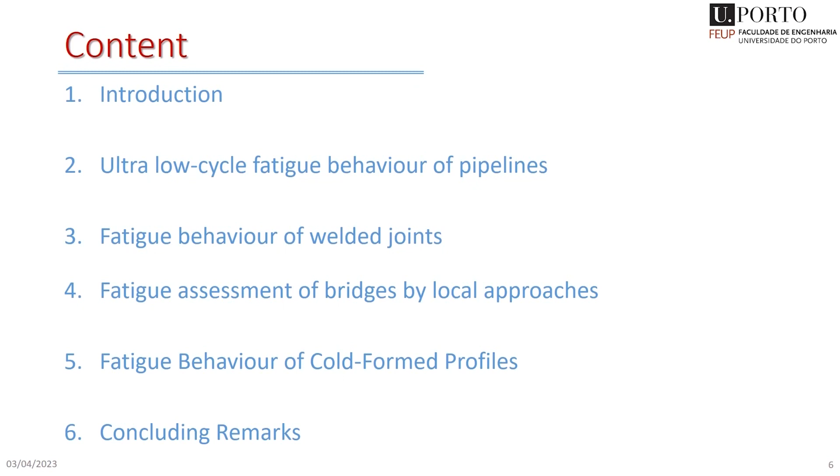Finally, some conclusions. This is a long presentation, so I will try to show just some results from those projects. Most of them were European funded projects, and as I said, they are all about fatigue.

Fatigue is one of the main degradation mechanisms for structures under cyclic loadings. It leads to very significant costs to society, and we must be prepared to address this issue.

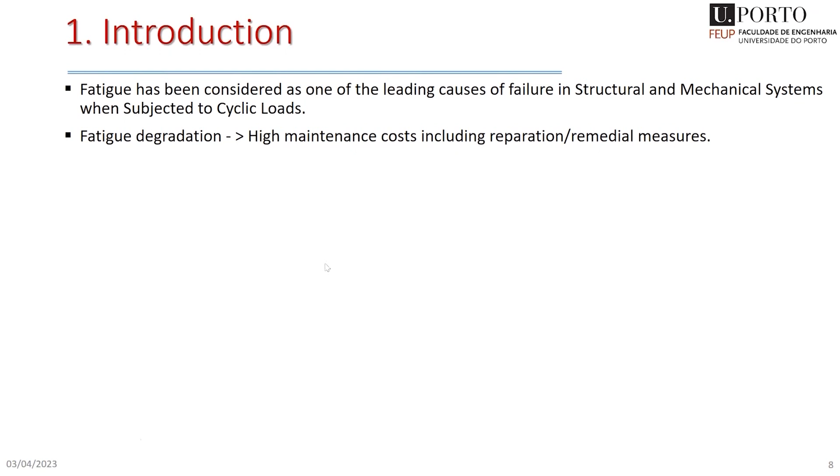Usually when we are talking of fatigue design, we rely on design codes. There are many design codes, but they are mostly based on what I call global fatigue approaches. Basically, we need to test large components, structural details, in laboratory to get S-N curves. From that, we try to classify details by their severity, about stress concentrations, in order to reduce the need for testing.

Then we try to group materials in very broad groups, like steels, aluminum alloys. We rely on stress analysis, but usually we try to use non-local stresses like nominal stress, when I can define that. Whenever we want to improve the design, to bring a new idea, we may be in trouble because our detail might not be foreseen in the previous catalog.

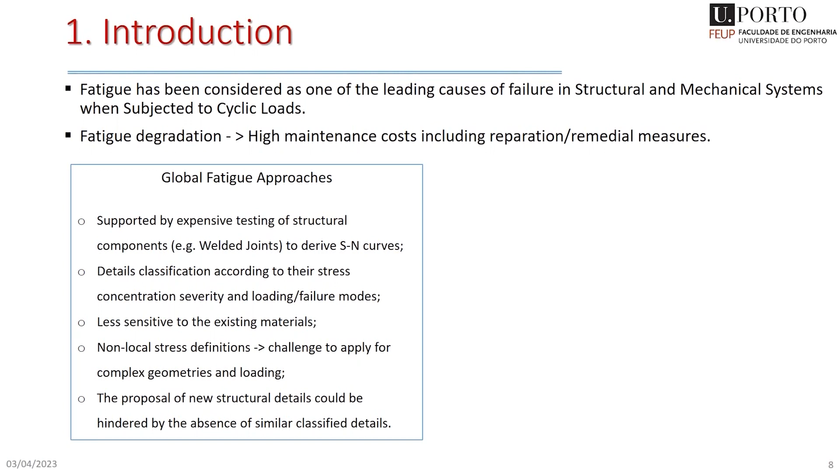So how to solve this? There are two ways. We can keep on with these global approaches, and we may need a lot of money to run tests and certify the new design. Or, as I am defending now, we may rely on material properties, with some very simple and standardized procedures to get those properties.

I'm talking of smooth material fatigue tests, fatigue propagation tests. We could characterize the material, but then we must transfer this knowledge from the material to the structure. For that, we will need fatigue models to make this transfer, and of course we will need numerical modeling to get local fatigue parameters like stresses, strains, energy, fracture parameters. So local approaches are not perfect, but could give us some flexibility for designing new systems. This is what I'm going to talk about today.

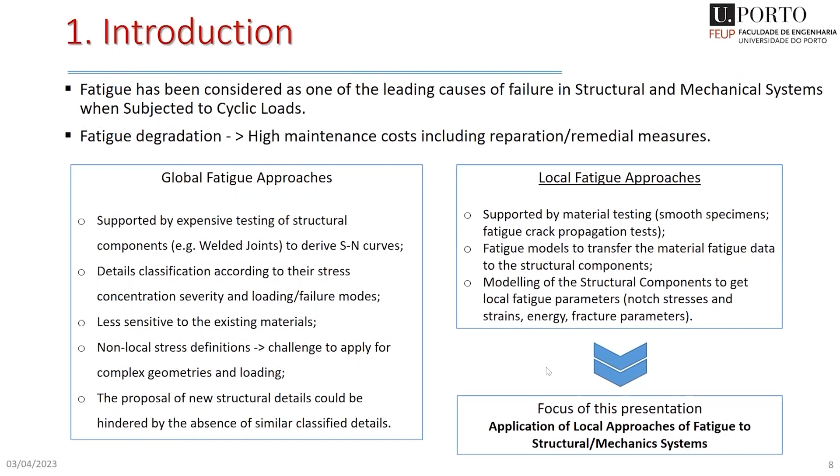I will give you some examples of the application of these local approaches to different structural and mechanical systems. I will talk first on pipelines.

We had a program some years ago, a European project that we coordinated in our faculty, about ultra-low cycle fatigue of pipelines. We were at that time thinking on the cyclic actions on pipelines, seismic behavior, but this project was more focused on strength prediction.

Then some notes about welded joints and bridges. Welded joints could be used on bridges, but we also have some work on more traditional bridges, those that we have many of across Europe, made of rivets. We want to preserve that. We must still be operating our infrastructure or transport system on those bridges.

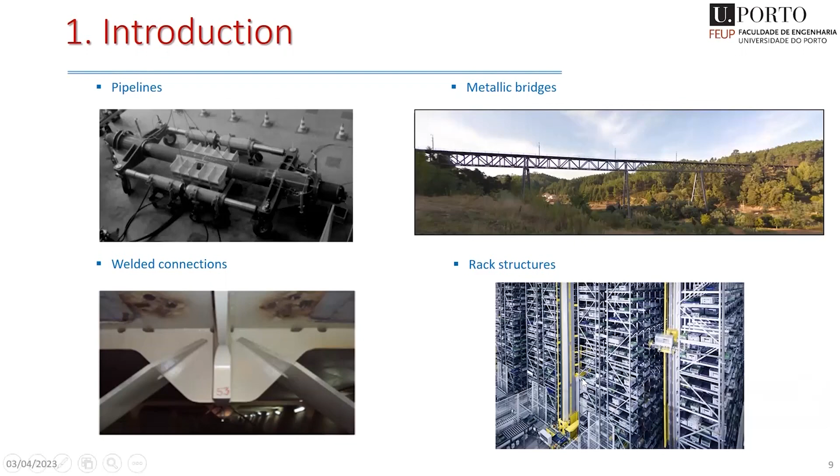And finally, the more recent experience in rack structures.

About ultra-low cycle fatigue, we are talking of a damage mechanism in the transition between what we know as low cycle fatigue and monotonic fracture. On the left, you can see a typical fracture surface from a ductile steel, where you can see this dimple type of microstructure.

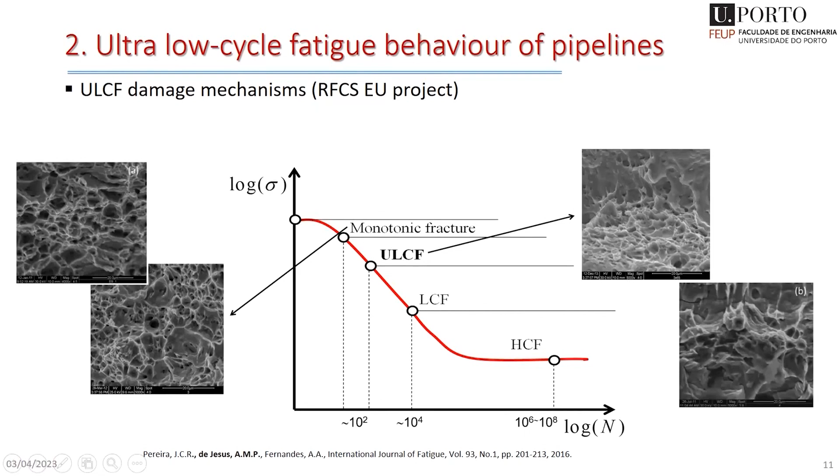On the right, you can see what we could get from an ultra-low cycle fatigue testing, where in this cyclic testing we can also find some dimple formations, which tell us that we are talking of a transition damaging mechanism. So we must understand that during this extreme cycling process, somehow we will get some mixture, and we must rely also on the knowledge from ductile fracture.

So this was a European project that we ran, and in this project we developed different models. One of them, in my opinion the simplest one that could be well suited to be included in future design codes, corresponds to a modification of a proposal previously developed by the researcher Xue.

So in this model we did some modifications. First, we transformed this model into a multi-axial damage model. We incorporated an equivalent strain definition, plastic strain definition, suggested in the ASME design code. Then this equivalent plastic strain range was divided by the fracture strain of the material.

The fracture strain depends not only on the stress triaxiality but also other stress parameters like the load angle. In that case, we adopted the Bai-Wierzbicki approach for the fracture strain. So our fatigue model is multi-axial, and also depends on the stress tensor triaxiality and third invariant.

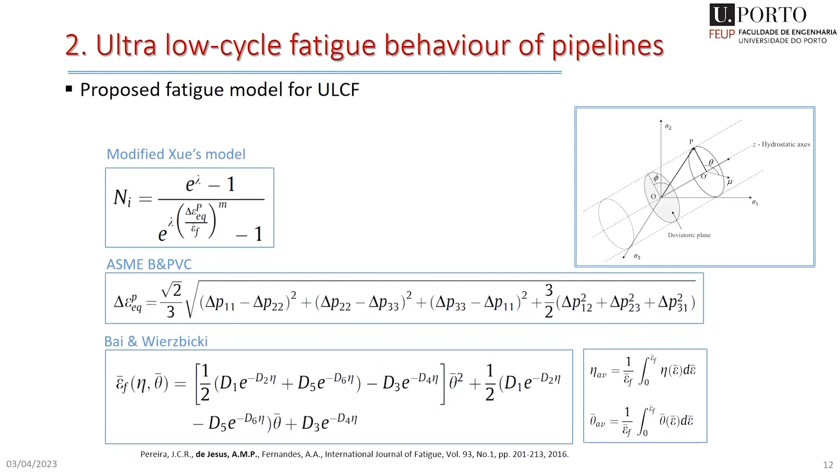So we went to the laboratory and did some tests in order to identify our model. For that, we needed to run some static fracture tests in order to get the fracture strain.

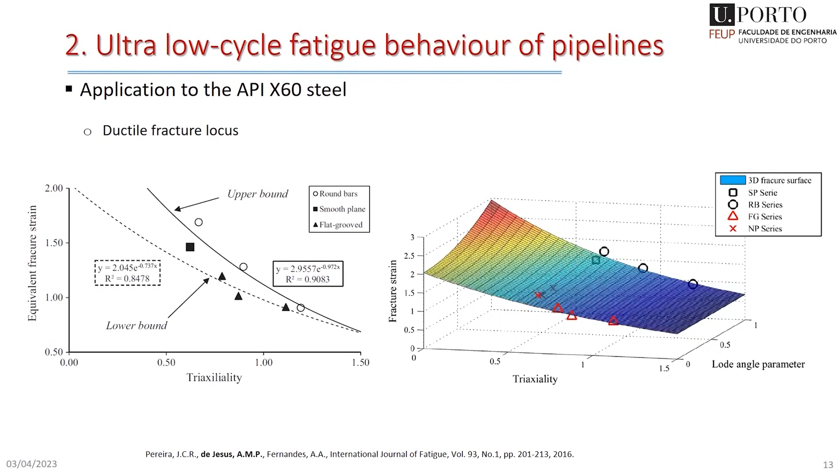In this case, you can see for the X60 steel, the fracture locus, where you can see the fracture strain, plotted against triaxiality on one axis and the Lode angle parameter on the other. You can see that the ductility of the material is not constant. We may have a lower bound and an upper bound depending on the stress, for example whether you are in plane strain or plane stress.

Then we need to run cyclic fatigue tests, also covering different stress triaxialities and Lode angles, and with that we were able to identify our model.

This approach leads us beyond the concept we are used to, the SN lines. Now we are suggesting the use or definition of SN surfaces, where you add a third dimension to the SN line, which could be this stress state parameter, triaxiality or Lode angle parameter.

This is the material characterization. As I told you before, this is one of the ingredients that we need for our local approaches. Now we must go to the components.

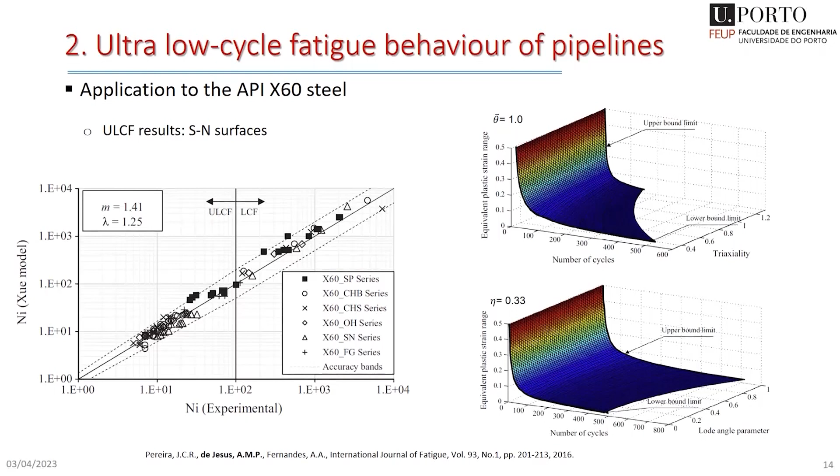In this project we had the opportunity, with other partners, in this case ArcelorMittal, to run some large tests on pipes. We tested two kinds of piping components, straight pipes and also elbows.

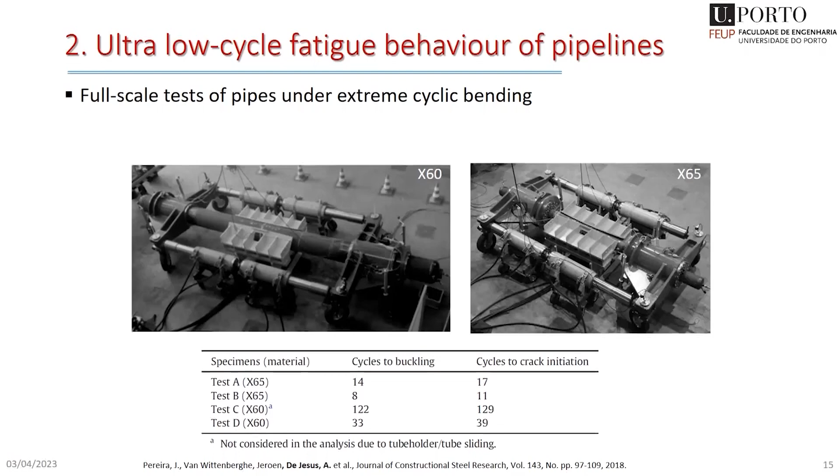Here I will just show you the straight pipes, which were bent, cyclic bent, in order to get a very small number of cycles to failure in the regime that we call ultra-low cycle fatigue, which is below 100 cycles, more or less.

So then we went to the modeling. Again, we need a material model. Then we need to run a precise numerical simulation of the structural components.

In this case, we model the pipes using cyclic plasticity, with kinematic hardening, Chaboche nonlinear kinematic hardening. One key point of this simulation is to capture the plastic instability. Otherwise, you cannot detect the strain localization, and you will not succeed in the fatigue simulation.

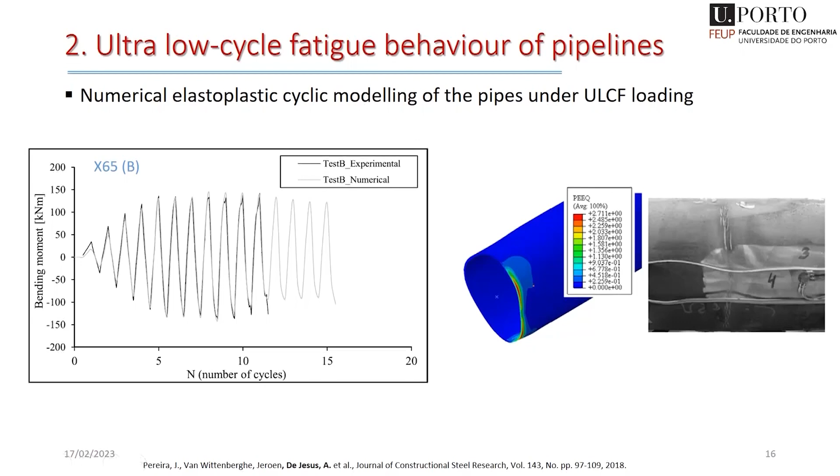So we did that. I'm just showing two results. In this graph, you can see the bending moment applied to the large pipes against the number of cycles. You can see this bending moment reduction, which corresponds to the starting of plastic instability, captured by numerical modeling. Then we were able to predict the fatigue life with a very narrow error margin.

We did that for two materials, two pipeline steels, X60 and X65, with different dimensions, and it was possible to get very accurate predictions, with an error of one cycle in 11 or two cycles in 39.

We have published a book about this, so if you want raw data or more information about the project, I can give you details later.

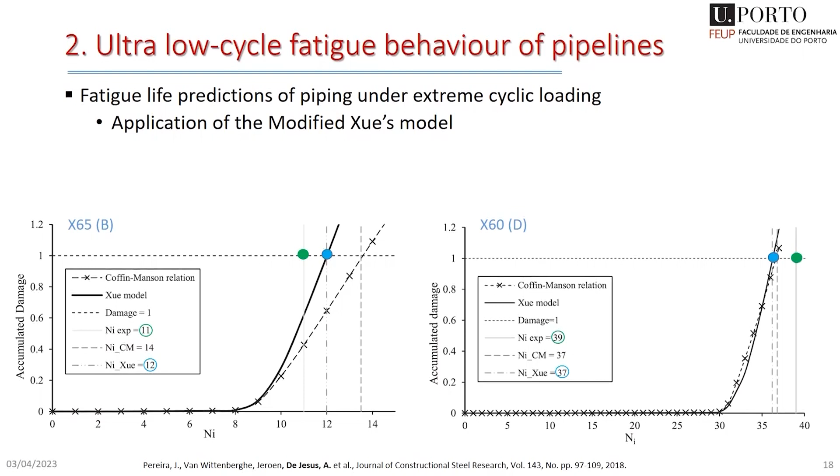Now I'm moving to the welded joints, fatigue behavior of welded joints. In this case, I started, a long time ago, more than 10 years, collaborating with a colleague from the United States. It was a few years after my PhD, because I did my PhD in fatigue of pressure vessels.

I did a lot of tests on welded joints, and at that time I learned about this colleague, Pingsha Dong, from the United States.

He was developing a new concept called structural stress, which is a local stress definition, again local approaches. In this proposal, I went later into this development, and I was sharing my data to validate this technique.

Recently we revisited this for another application. We started with pressure vessels, now we are applying this to welded bridges. Here we are talking of two important aspects, two pictures.

First, a stress definition, structural stress definition, which is stress linearized across the crack propagation path. That stress definition is totally compatible with the nodal forces from numerical simulation.

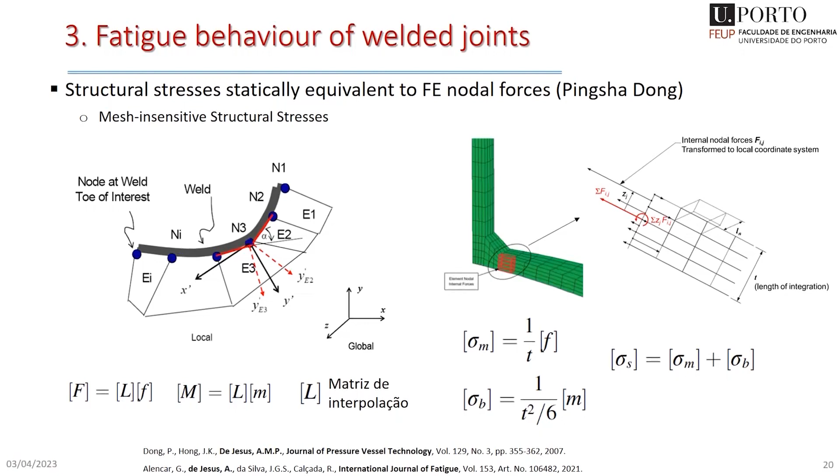So this is one part, the structural stress definition, which is almost mesh size insensitive. The other part is the integration of the crack propagation law. I'm not showing here the details.

So a fatigue crack propagation law, which accounts for small cracks and the nonlinear stress near the weld toe. That was done analytically, and we derived this concept of an SN curve, where we have a new definition for the structural stress that depends on the size of the component, like plate thickness or crack propagation size, and also information about the structural stress definition.

So we have here this combination. We may have more bending, less membrane, or the reverse, so we must take that into account in our stress definition, and also whether we are in displacement or stress control.

In doing that, we were able to match in the same correlation band about 800 points, where these colored ones are from my old PhD.

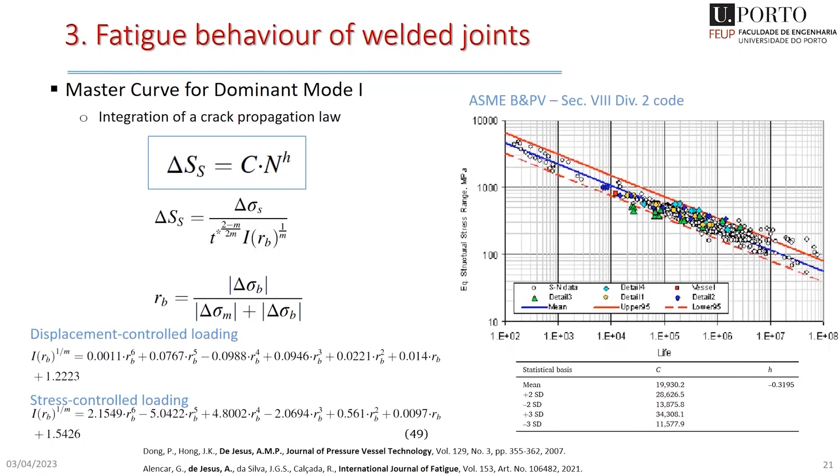Recently, with a new PhD student in civil engineering, we implemented this idea of master curve structural stress in ANSYS post-processing, let's say, as a model.

Besides the mode 1 fatigue cracking, we added the mixed mode, mode 1 and mode 3, leading to the effective equivalent structural stress. Nowadays this is open for use. You can download the paper, install the routines if you have ANSYS, and run this for your welded joints. It accounts for mode 1 and mode 3, so a multi-axial process.

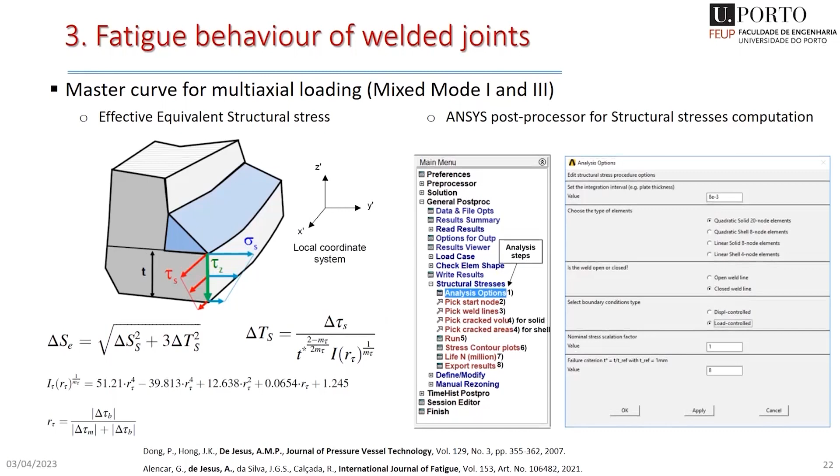We tested this for a well-known case study from the SAE, a cross-beam welded joint, where we have multi-axial stress fields, and we tested this with different numerical models, with different finite elements.

We know this case study is available, and we know the experimental data. We found that if we consider just mode 1 fatigue cracking, we will not predict fatigue life correctly, and we will be on the unsafe side. But if we consider this multi-axial approach, we will have very precise predictions for this component.

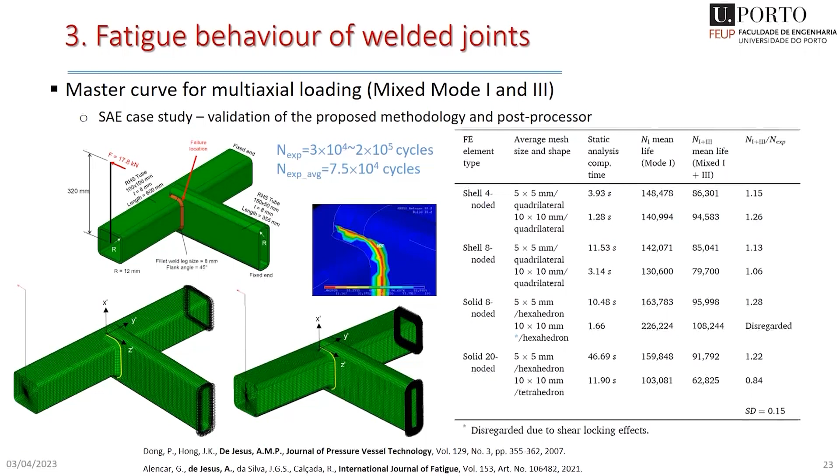After that, we were pleased with this post-processing tool, and then we moved to the bridge components.

So the idea is to apply this technique in welded bridges, but since we cannot test the bridges till failure, we must rely on laboratory specimens.

So we went to the literature and found a very nice, valuable database from John Fisher from Lehigh University. This data was the basis for current design codes, European and American design codes for welded joints. At that time, John Fisher ran very important tests in his laboratories for more than 10 years, maybe 15 to 20 years. So we are talking about large-scale components of welded joints.

At that time, this was used for the application of nominal stresses and hotspot stresses. In this case, we revisit this data and apply this new definition with the master curve concept, because we tested that for pressure vessels, not for the typical details on welded bridges.

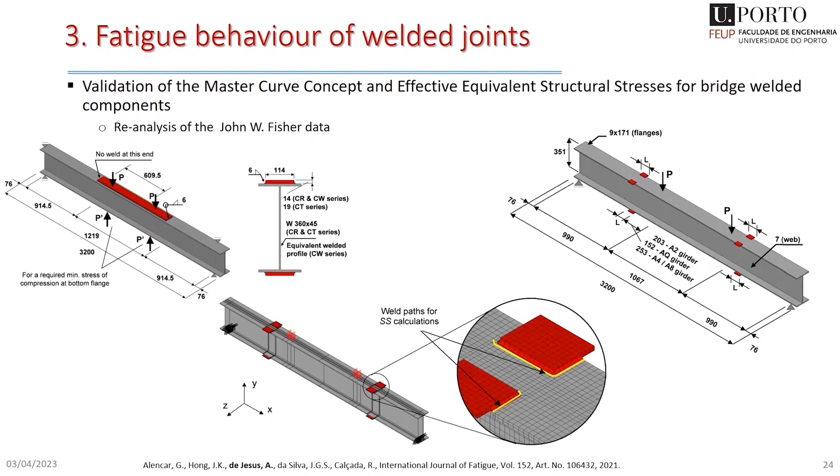So I'm talking about, for example, girders with some attachments on the flanges, welded attachments, as you can see here. Then we have other longitudinal girders with stiffeners. For those stiffeners attached to the web, we have some gaps between the end of the stiffener and the flanges, which generate some distortions on the webs. We also have some bracings, which increase the distortion in the flanges, or in the webs, sorry.

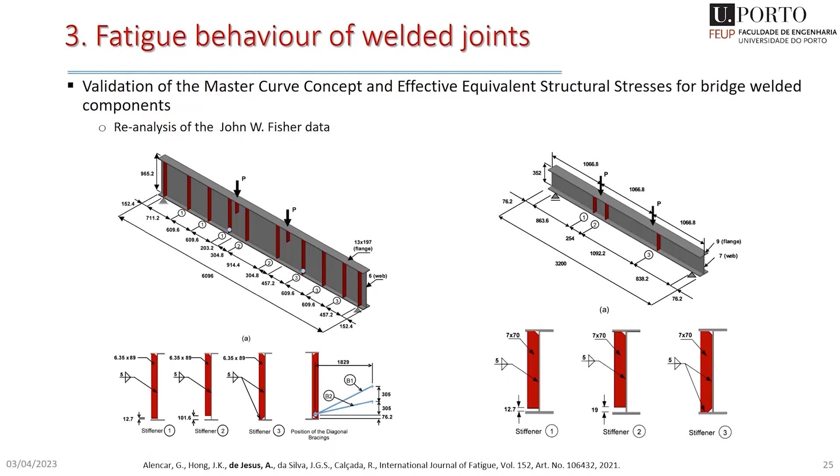So we also have some models from bridges, with girders connected to each other with horizontal girders, connected with the gussets, and asymmetrical loadings, generating again these distortion effects on the structure. So multi-axial stress fields.

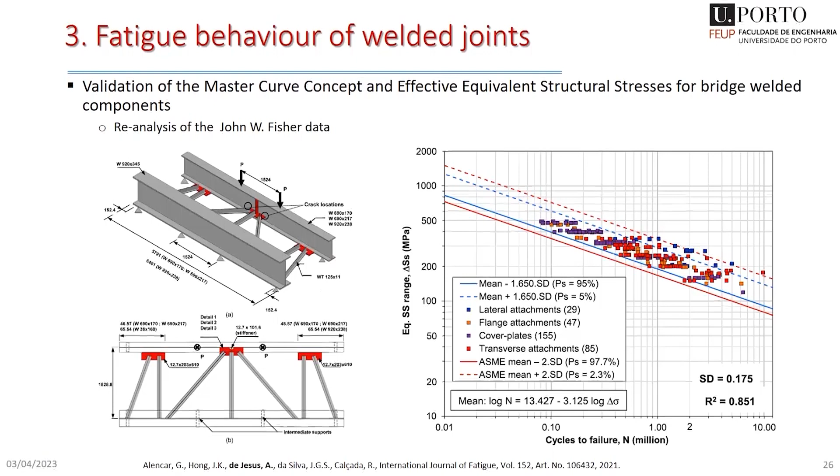So we were able to match all the data together. That's the most important message. We superimposed these with the pressure vessels, and found a very good correlation with the previous database. So we are adding more than 300 more or less points to the existing database.

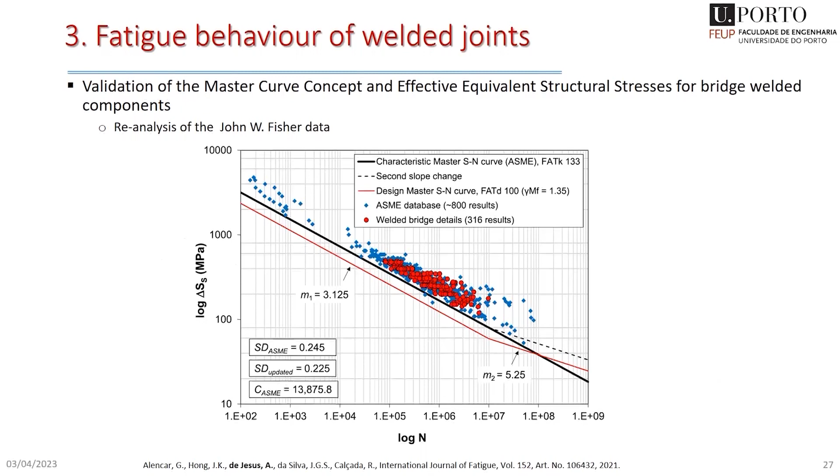So for the moment, we can say this is robust for, let's say, pressure vessels and welded bridges, where we have special multi-axial loading cases. So I guess I over-exaggerated in the size of my presentation. I would just want to make a few more comments about bridges.

We started a long time ago with material characterization, again the basis for our local approaches. So we ran fatigue tests on samples removed from the old bridges in Portugal. We also did fracture propagation tests.

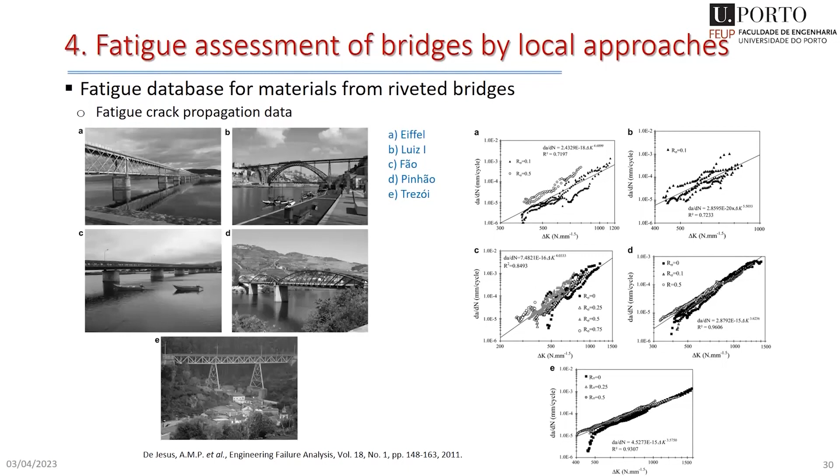So the question is how to use this material information now for bridges, for fatigue life prediction. The first problem we have is a multi-scale problem. We are talking about a very large structure, and fatigue is always local, so it happens on crystals, material crystals.

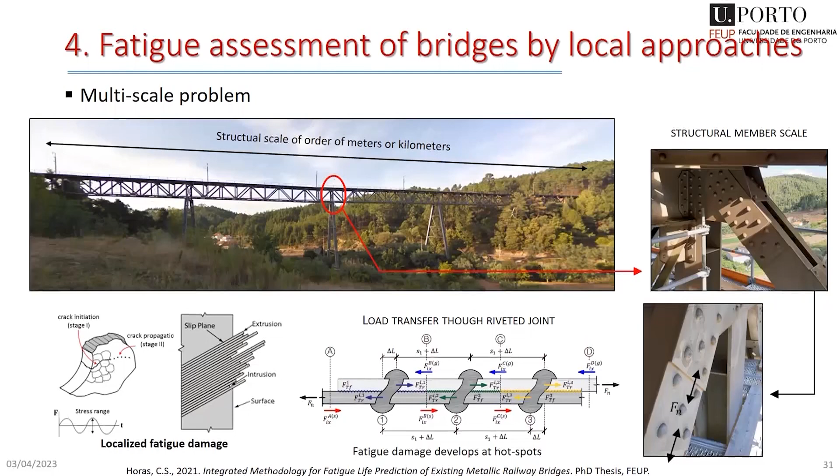So how to connect these scales? We cannot model this complete bridge at the scale of the grains. So to overcome this, we have been working on some tools.

Also, in bridges, we have dynamic loads. Trains crossing the bridges at different speeds will induce different vibrations. Also, we have a lot of different trains crossing the bridges, and each day could be different. So how to solve these problems?

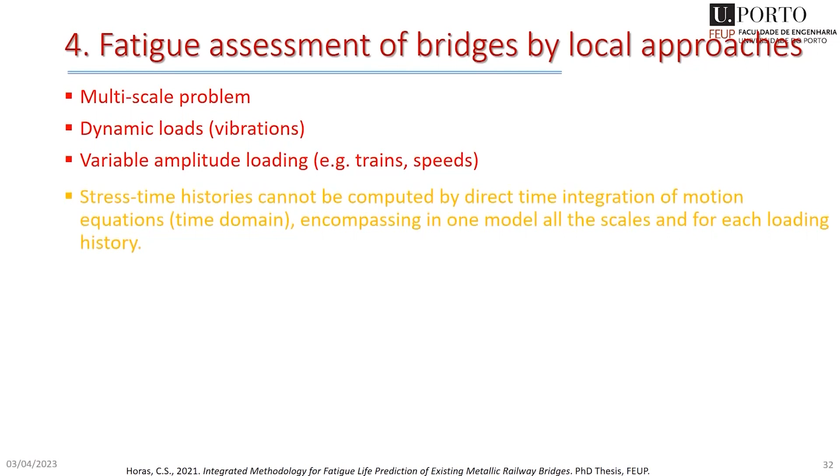For sure, we cannot solve the problem by integrating the dynamic equations for this complex structure with the required fatigue scale. Fortunately, we can see that all these sections work in linear behavior. So the idea is to solve the problem in the frequency domain, meaning modal superposition. But that's a classic technique for dynamics.

The idea here was to expand this classical idea to get the local fatigue parameters—not stresses, not strains, but stress intensity factors. Also, we need to make submodeling, otherwise we cannot solve the problem.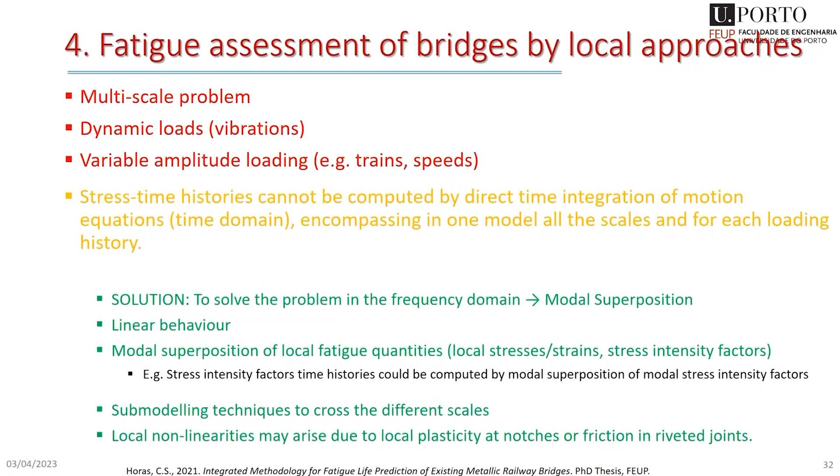And bad news, we have some local nonlinearities. At notches, we may have some local plasticity or contact between plates. So how to solve this? We started to run—another student, Claudio Horas, did his PhD on this topic.

So we started to run different case studies, starting with a simple beam with a moving load. That beam has some defect, the flange with a hole. And we can say plasticity is local.

So we can run a global elastic model, and then make post-processing of the elastic stresses and strains to get local values using Neuber, Glinka, or Morrow's equations, as you for sure know.

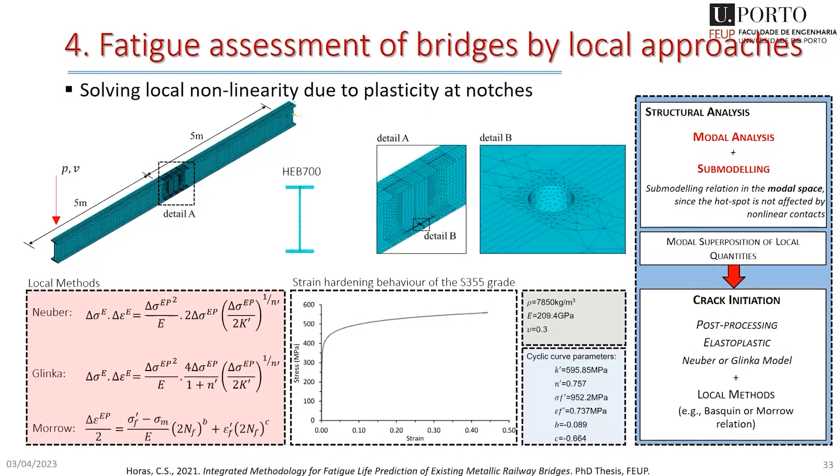Besides that, we can apply submodeling. This was done, and we proved that if we have local plasticity, we may have precise predictions of local stresses and strains using modal superposition. In this case, we were able to compare with the exact solution, direct time integration, because we are just talking about a beam.

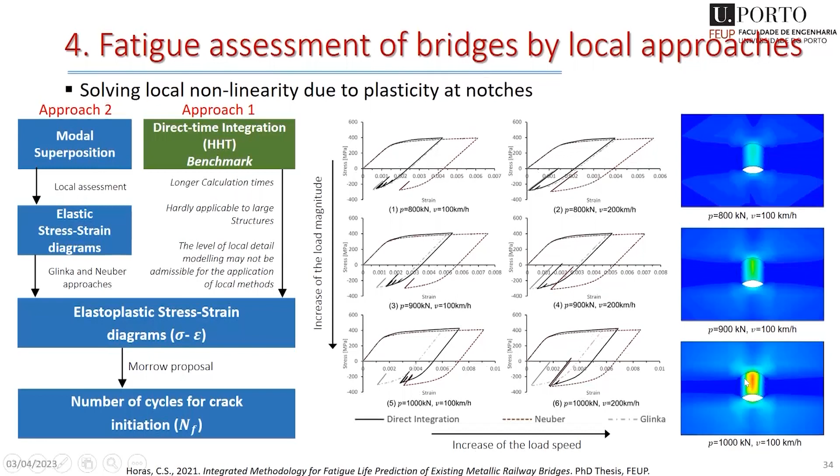But okay, we get that Glinka's approach did very nice predictions. Neuber was not, we know it's conservative. So the deviations start after the plasticity starts increasing, which means higher loads, higher speeds maybe.

When we have contact, we can no longer apply this modal superposition. We may prepare some submodels, and in this case, if our nonlinearity is inside the contact region, we will lose some efficiency in the computation.

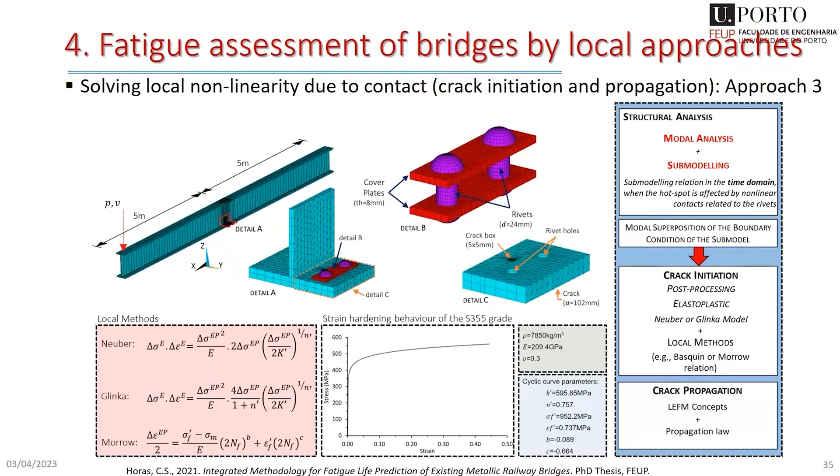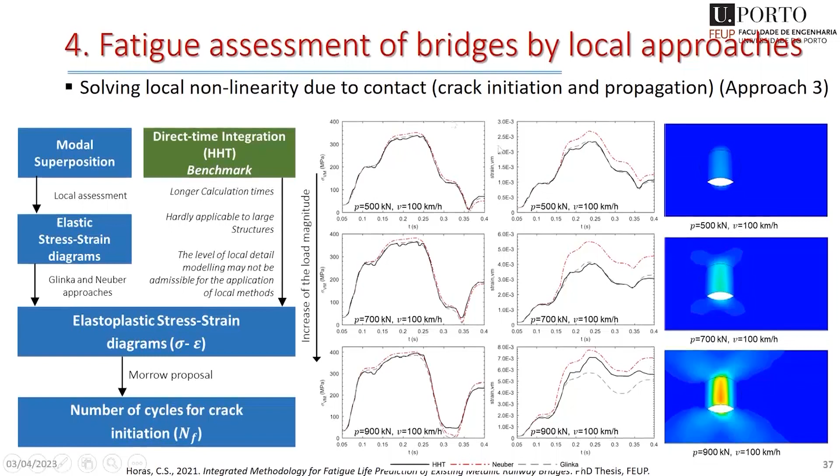The idea is to make the modal superposition in the local boundary conditions of our model instead of going directly to the hotspots. So this is the local submodel, and again, I call this approach 3. In this approach, we are applying modal superposition to the boundary conditions of our submodel. Using this, we will lose some efficiency, but we can get precise predictions of the local quantities.

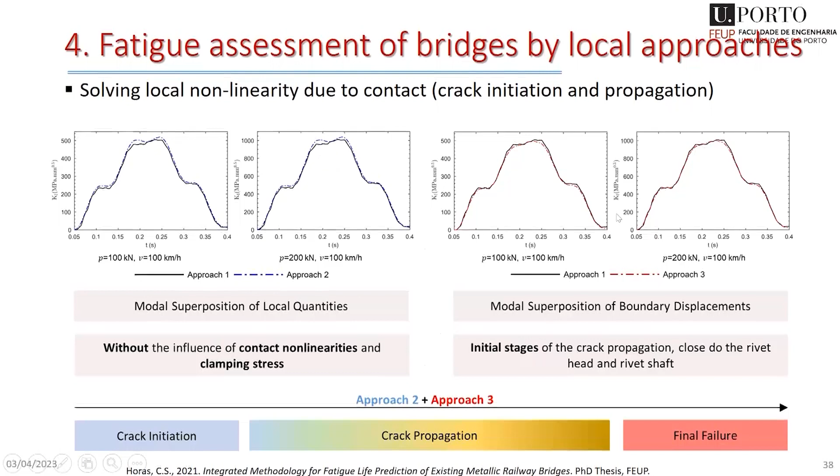But if we have a crack starting in a rivet hole, inside a rivet head, we have contact, we have nonlinearities, but the crack is growing. As soon as the crack moves away from the contact region, we can go back to the approach where we can compute directly, for example, the stress-intensity factors using modal superposition.

So with that calibration, let's say, we went to the bridges. Sorry for the slides that are too dense, but anyway, we are talking of local approaches. One important message: we will not apply this as the first option. First, we should apply global approaches, and only then these approaches will be applied to the critical details, okay?

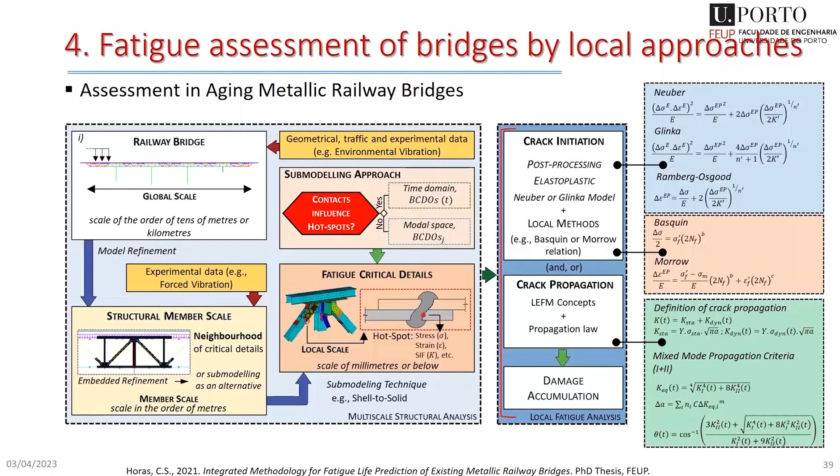If from the global analysis we realize, okay, there should be some critical connection, in that case we need to go locally and check with a more advanced approach. Otherwise, this will be too expensive. So this is the way: we always need a global model.

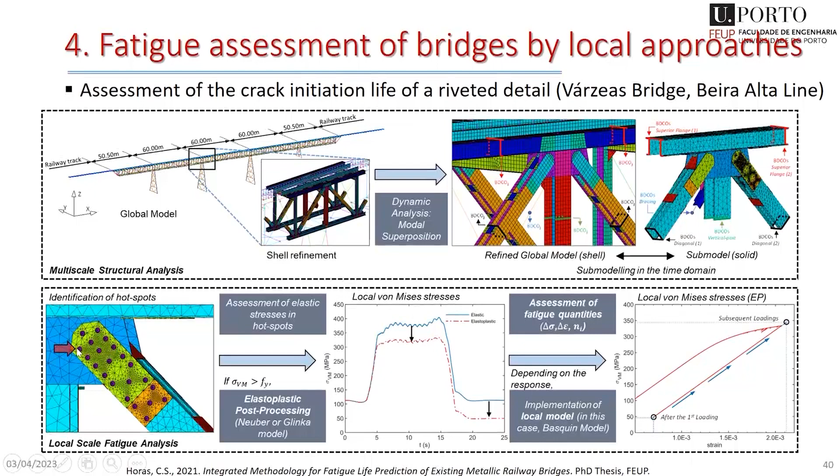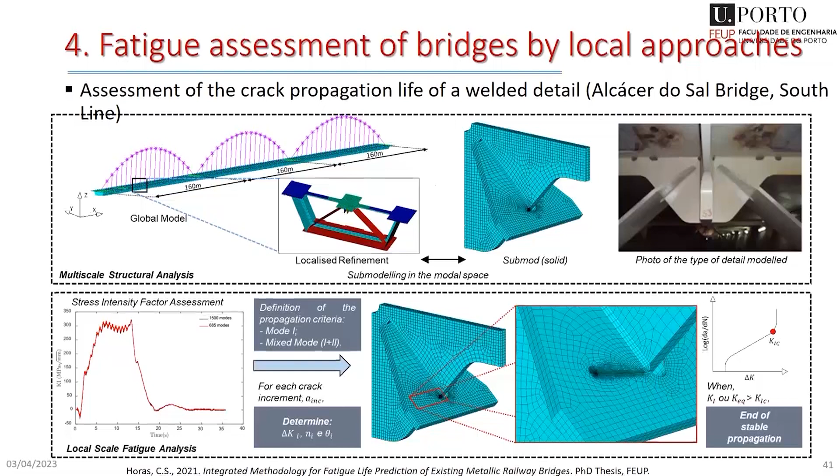Then we can go locally to the rivet, and in that location we can apply our modal superposition. The same could be applied for welded bridges. So we are talking, instead of stresses and strains, of stress intensity factors. So we can predict fatigue crack propagation in the existing bridges.

Okay, finally I would like to refer for just a few seconds to cold form profiles. As I told you, these kinds of rack structures are used for e-commerce, and nowadays they are running 24 hours, 7 days. Loads are increasing, speeds are increasing, and design restrictions are pushing toward thickness reduction. And we are starting to observe critical failures, let's say some failures in this equipment.

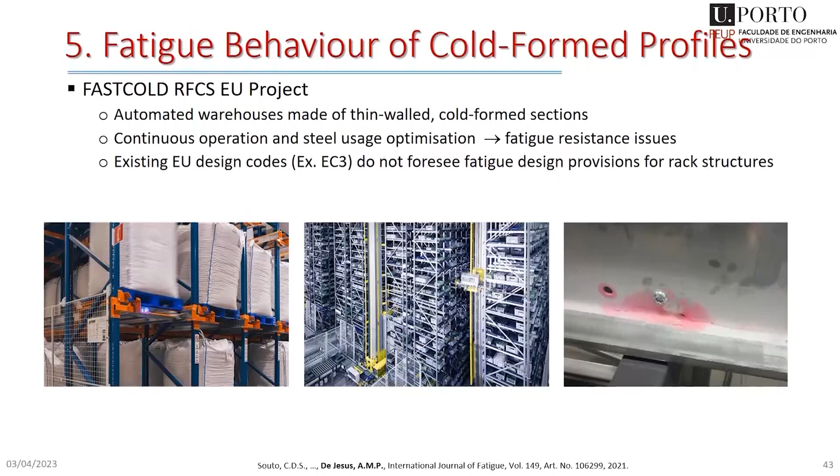And we realize that there are no design rules in our European Eurocodes for these thin profile thickness sections, because the European codes were prepared for thick thicknesses. So we had this FASTCOLD European project to check, to derive proper design rules for these cold form sections.

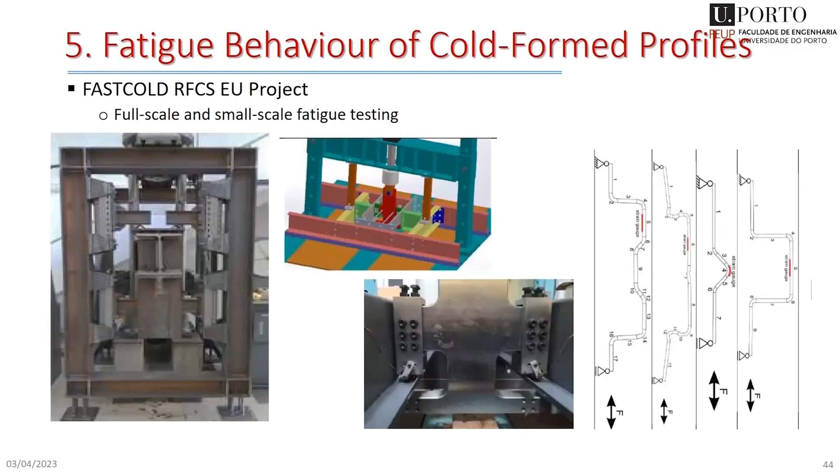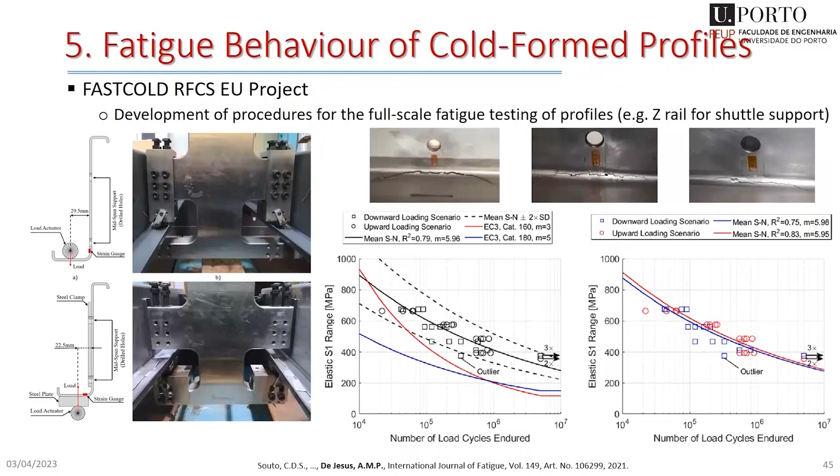First of all, we started with a campaign of component testing with column-to-beam connections, the rails, and also in parallel some small-scale testing with some profiles. We had to develop new testing procedures because we never tested those components before, but we succeeded. We got a lot of data, and nowadays we can propose a new design code for these profiles.

So we are talking here of a lot of data, and the most important message is: in this kind of thin sections, we are talking of fatigue cracking in the corners. So the corner geometry will always be a key geometric parameter. We must be careful about that, careful about manufacturing, because if you are lower than R over T of 0.5, I cannot say that we can use these design curves.

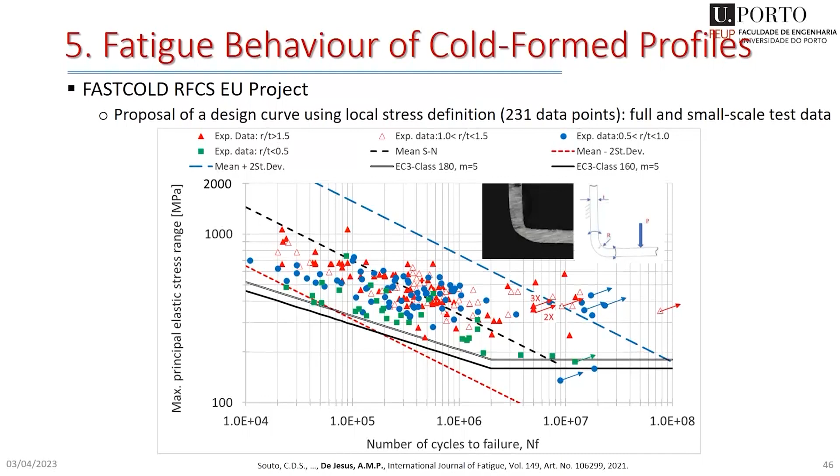Of course, I forgot to mention, here we are already using a local stress, an elastic stress in the corner of the profiles, which is a local stress definition. But anyway, we went to modeling.

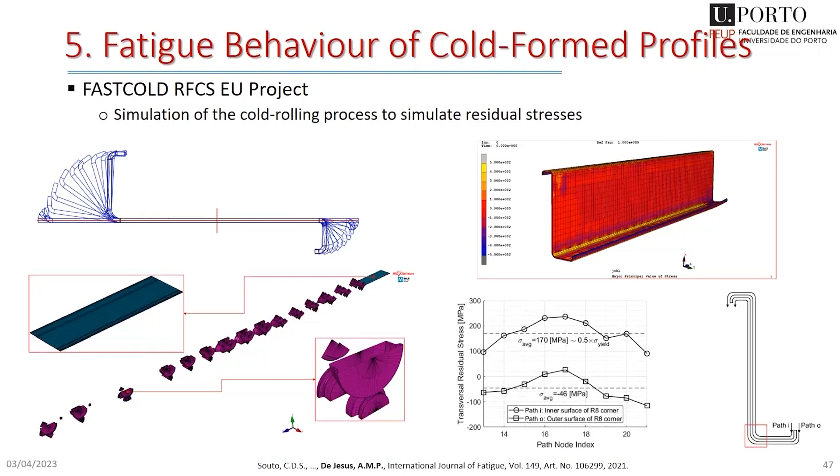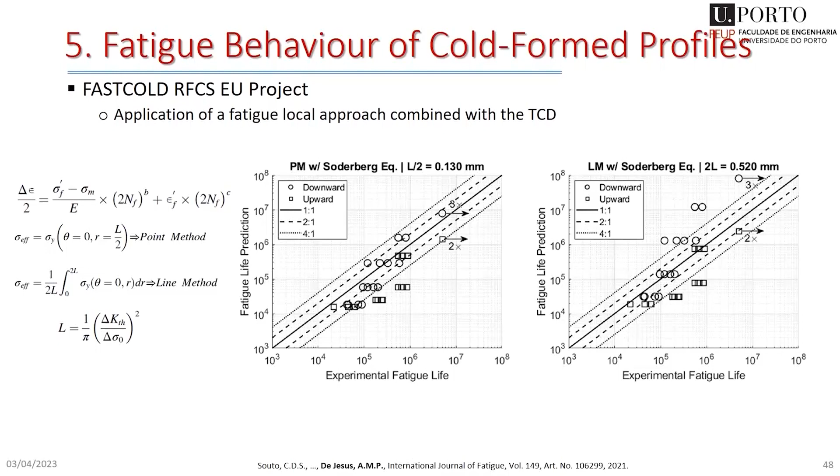And in this case, since I'm just finishing, just one more slide: we have to simulate the profile production using numerical modeling, just to get the residual stresses in the corners. And with that, we applied local approaches that we discussed before about the critical distance theory for fracture—now I'm talking about that for fatigue. We applied that, and we succeeded in generating predictions of the fatigue life of the profiles.

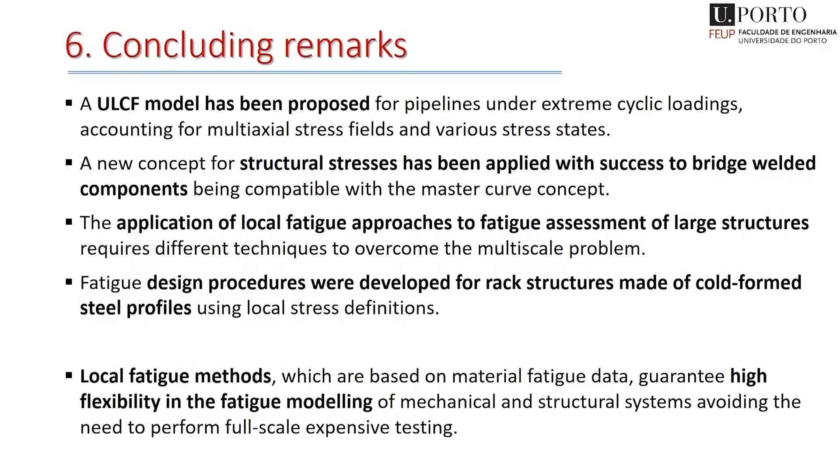So to summarize, as you can see, we can apply this local fatigue approach in different fields, very different fields, from mechanical to civil engineering. I have to say this gives us a lot of flexibility in modeling, and we rely on more affordable testing programs. So I would recommend this as an alternative route. Thank you for your attention, and sorry for being late.